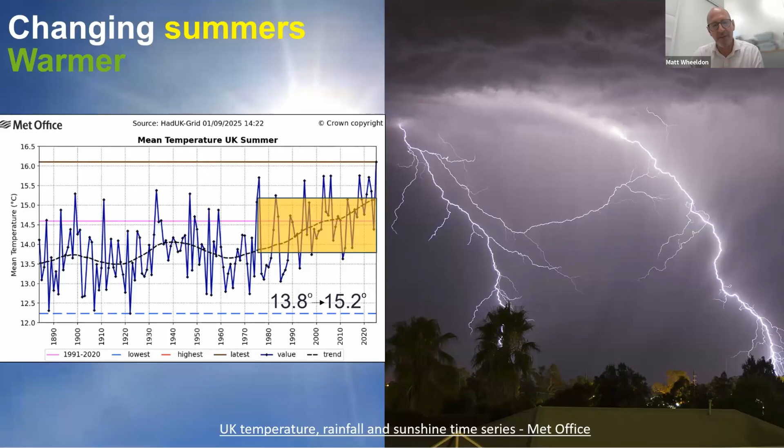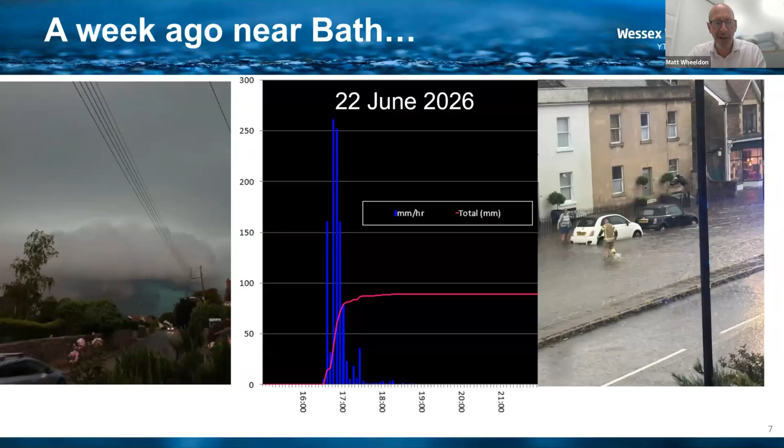So 50 years ago, 1976, of course, a very famous drought for those of you who remembered that. Many of you won't remember that, but in those 50 years, the climate has changed remarkably. And if you project that dashed line forward another 50 years, boy, we're going to be in a very different place. And of course, that warmer summer brings wilder weather. So whilst the rainfall volumes don't actually increase, the weather becomes a lot wilder. And last week, last Monday, this was the weather in Bath, where I live.

And that middle graph shows the rainfall intensity. For 10 minutes, we experienced a rate of 250 millimeters per hour. We don't even have the ability to give that a return period, because the Flood Estimation Handbook kind of loses a bit of definition when you get below events that last less than an hour.

We're entering a new world, a world of tropical weather. And today is the International Day of the Tropics. So a very opportune day to be speaking on this, because our weather is moving from one of just drizzle to one of drought and deluge. And the picture on the right is just down the road from me, where there was certainly a massive deluge.

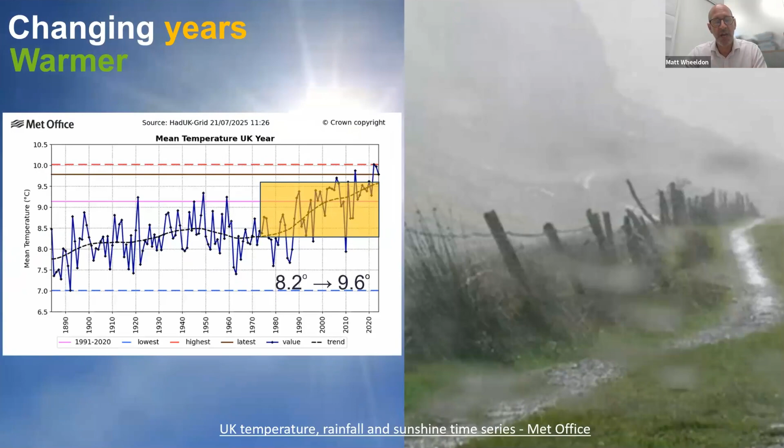Of course, it's not just our summers that are changing, our winters are getting warmer as well. And with warmer winters brings wetter winters. And then add in spring and autumn, and overall what we're seeing is a very rapid, well, from a climate change perspective, change in temperatures and rainfall. So over the past 50 years, rainfall over the year has increased on average in the UK by 150 mil a year. That is significant.

So let's get back to our topic, because of course, flooding and storm overflows are all about having too much rain. And water companies are investing billions to try and address this on their sewage networks. And there are kind of 4 options open to them. 1A and 1B in front of you is called separation. That's where you take the rain out.

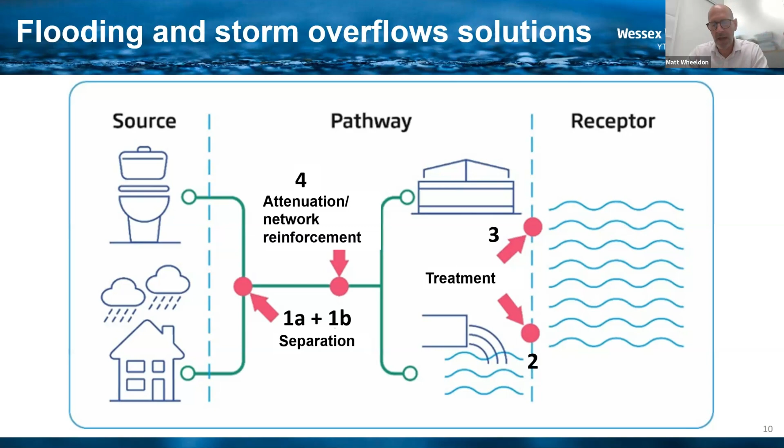2 is opportunities to treat the overflows. 3 is where you increase the treatment capacity at the treatment works. And 4 is where we deal with the problem in the pathway. We attenuate the rain, or we just build bigger pipes. I'm just going to go through these and talk about them relative to one another. And you'll see where I'm going to end up in 1A being the best solution.

The traditional solution for storm overflows has always been storage tanks. Very high carbon embodied in the concrete, and then a massive carbon footprint for then emptying them and then treating them. People forget that this contaminated rain all needs treating, and when we treat, we use energy and we use chemicals. And a lot of those chemicals are flow related. So if you're going to treat a higher flow rate or flow total volume, you're going to use more chemicals. And the carbon footprint of those chemicals is pretty significant.

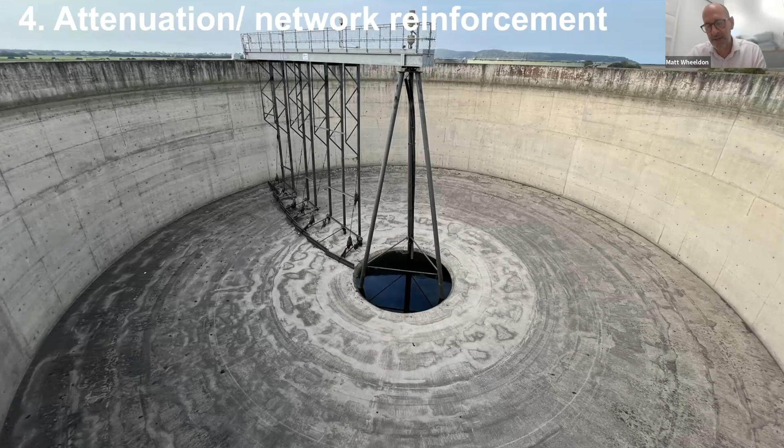Just to give you some perspective on this, in a dryish year, we treat more than 50% more liquid than we provide our customers. So that means that 50% of the total flow that we treat is rainwater, and in a wet year, that number goes up to 80%. So that 50 to 80% extra liquid treated because of combined sewer systems is going to go up even more if we deliver these kind of solutions. The energy is amazingly high.

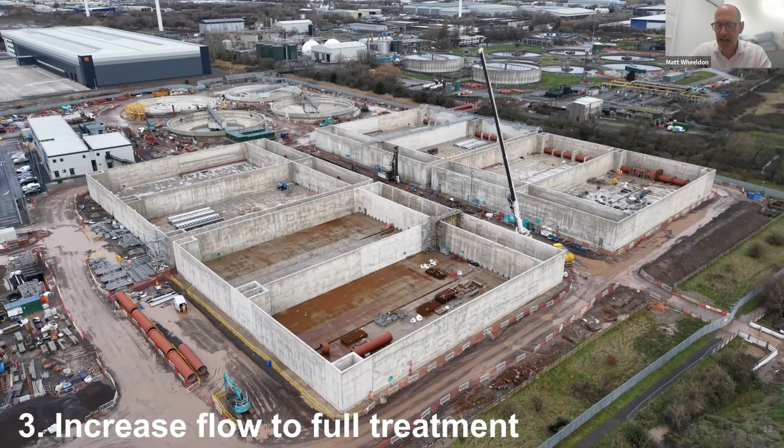Option 3 is you increase your treatment capacity at the sewage works, at the water recycling centres. Here is £150 million being spent at our largest site here in the West Country. This is at Avonmouth. We're increasing the flow to full treatment, that's the maximum flow rate, to 5.7 tonnes a second. Now, when you think how much sewage is actually arriving at this site, it is 1.5 tonnes a second, which means that we are treating 4.2 tonnes a second of rain. How daft is that? That is a traditional solution.

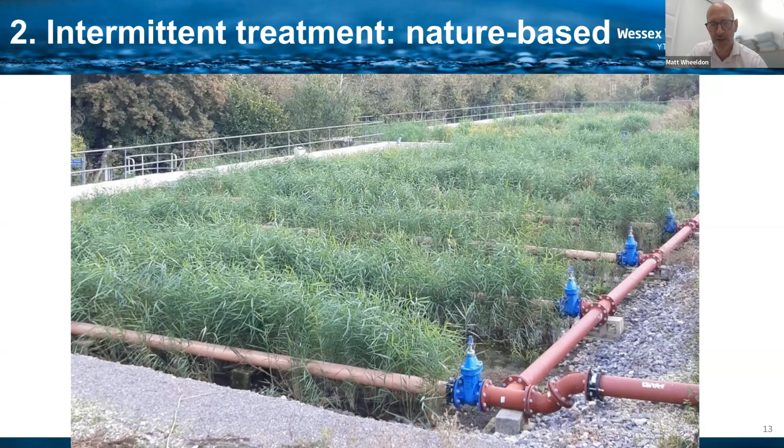People realise that a lot of these overflows are very low in concentration of contaminants and pollutants because of the dilution factor of rain. And so recognising that the level of treatment doesn't need to be significant, nature-based solutions, especially for overflows that are driven by groundwater, have become a very viable option, especially as DEFRA and the EA are now accepting these as trials. We've got 31 of these going on here at Wessex Water. The influent is incredibly weak, and the effluent is even better treated through these reed beds and nature-based solutions. So great, but an end-of-pipe solution, not really tackling the problem at source.

Let's get onto separation solutions and managing rain closer to where it lands. Developers have built communal SUDs for quite some time now, but they're not as great as everyone shouts about because quite often there is a lack of management and maintenance. Quite often that's passed on to a management company. The customers in the properties are paying not only to have their rain taken away in the pipes by the water company, but then paying another cost to the management company to maintain the SUDs. And when you look at that very same SUD on a map, what you'll see is that where we're dealing with the rain is some distance away from those new properties that have been built.

And that's not always a great idea, because if nature wouldn't have done that naturally, we're interfering with nature and we're moving the rain horizontally and gathering it together with its mates. And whenever you gather rain together with its friends, it generally causes problems. We should be really trying to keep raindrops lonely. They're far easier to manage.

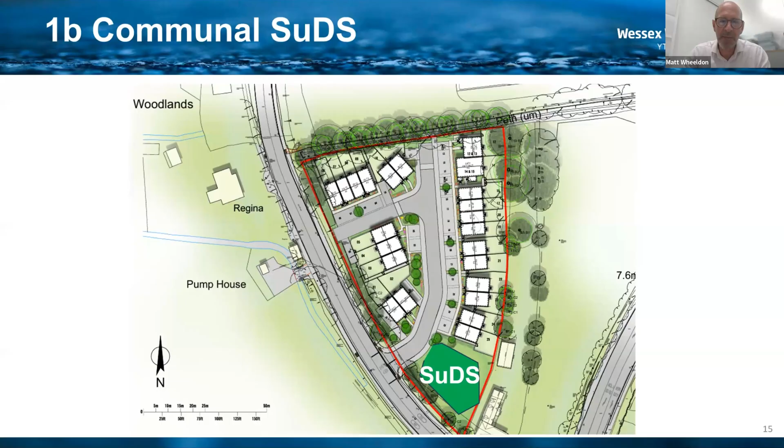And if you keep them very local at property level, it suddenly opens up another door of opportunity, and that is seeing rain as a resource. And the simple old, humble old, cheap old water butt is a great way of flattening the peaks of water demand. But then a simple rain garden or soakaway is a great way of getting rid of that rain back to where nature would have put it in the first place.

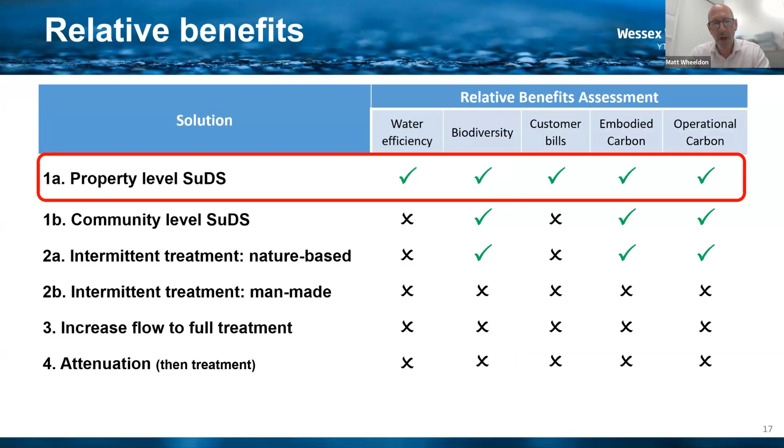So looking at all those options together, property level SuDS stand above them all from an impact on customers' bills, carbon footprint, biodiversity, and also water efficiency. Why aren't we doing them en masse? We're not really focused on where the problem is. You see, the problem is in our homes. The problem is that we're filling our toilets with drinking water, and then we're adding the rain off our roofs into the same flush from those toilets.

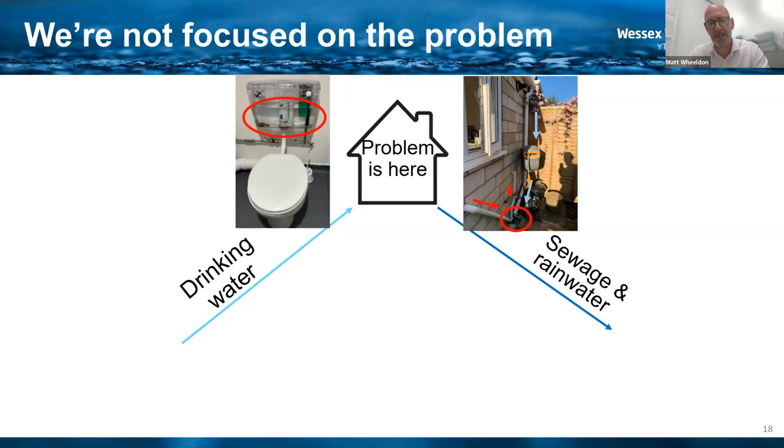Traditionally, water companies, on whom the burden to tackle these problems has always been put, fix them with centralised solutions. In the current state of play, lots of new strategic resource options are focused around big reservoirs. And on the storm overflow side, big new storage tanks.

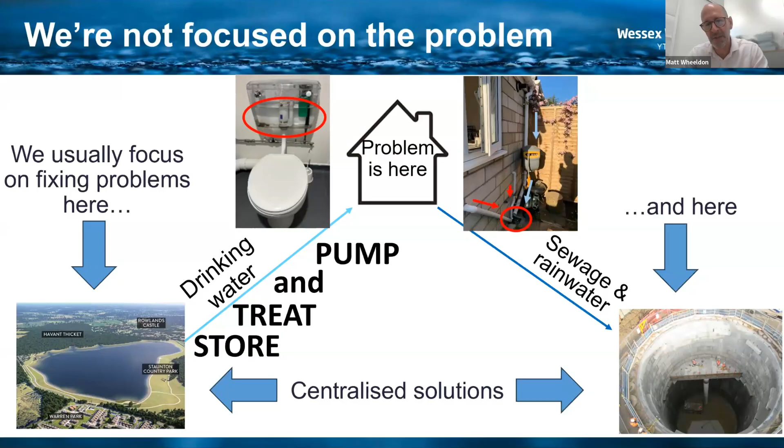And all that means is we're going to store, treat, and pump more drinking water to all these new homes that are being built, so that we can fill the toilet systems and water the gardens with drinking water. Then we're going to continue to allow rain to be added to the sewage, where we're going to store it, pump it, and then treat it all. These solutions are not great long-term, sustainable, climate-resilient, low-carbon solutions.

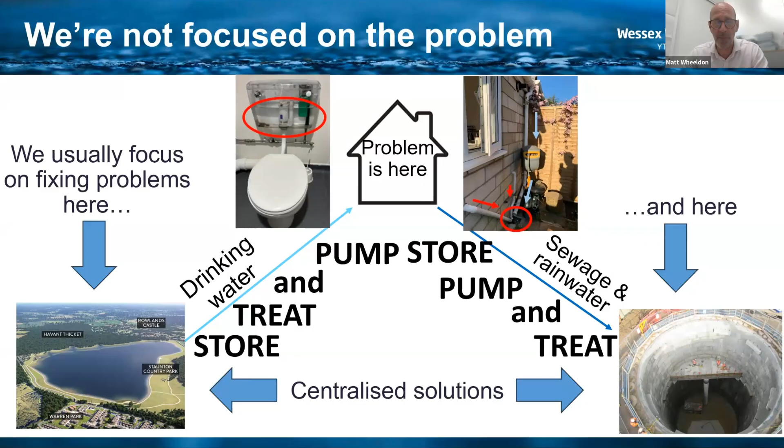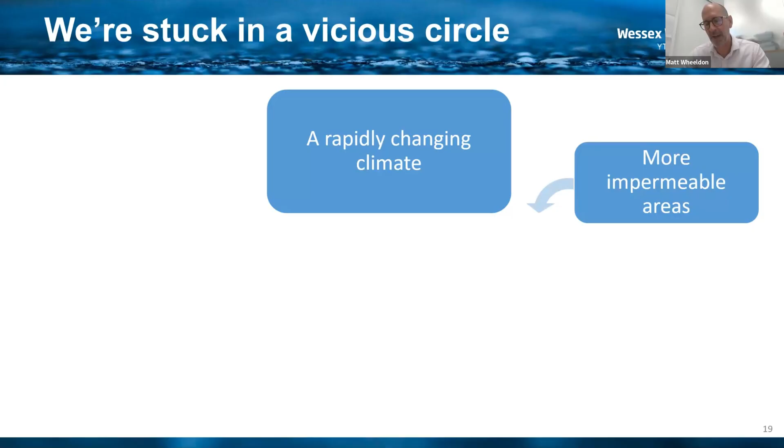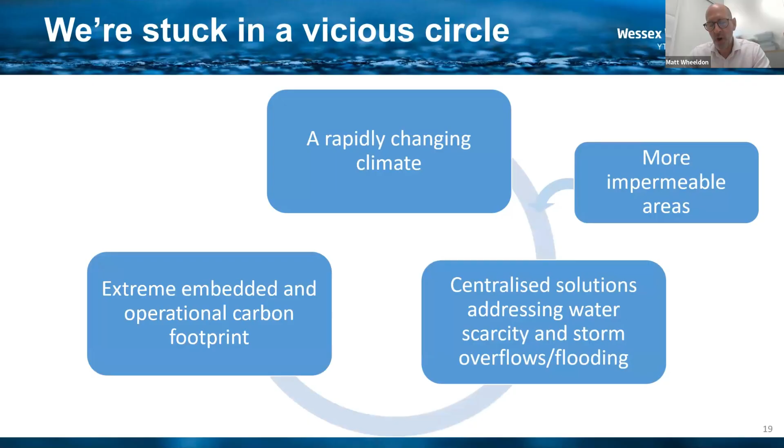And so we're stuck in this vicious circle with a rapidly changing climate that I've talked about. We're building 1.5 million homes, which will add a lot more impermeable area, and people are constantly paving over their driveways so they can park their car near their home, so they can charge their electric vehicles. Water companies are trying to solve the problems with centralised solutions to address both water scarcity and storm overflows and flooding, and that leads to higher carbon footprint solutions, which then creates a rapidly changing climate.

Oh dear, what do we need to do? Well, as I said right at the start, this is not rocket science. Janet and John were famous characters in the 1940s and 50s in children's books, and they were renowned for speaking very simple language. And that's really how we've got to start. We've got to start by changing the narrative.

You guys, because you are connected with CIWEM or you're linked to CIWEM, will understand words like integrated and systems thinking and holistic and catchments. But sadly, most people don't understand those. So we really need to simplify the language and just talk about managing rain better where it lands. This is a message that is simple, but it is a message that is getting through.

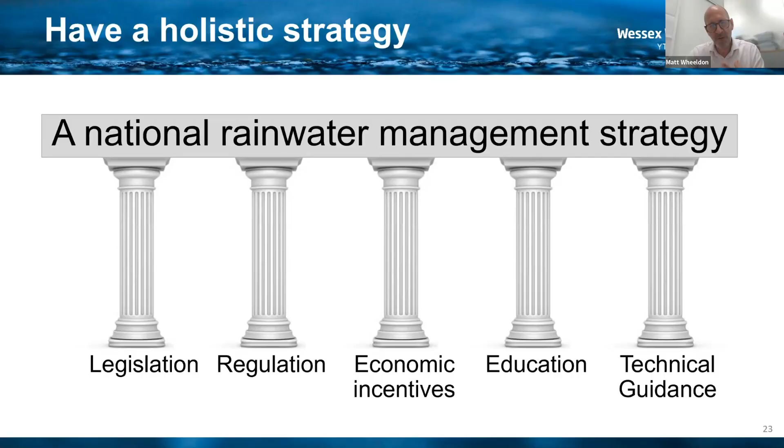Well, we do need a holistic strategy to deal with rainwater, and it's something that we don't really have in this nation. There's nowhere where people are considering changes to legislation, regulation, building economic incentives to help people do it, improving education and improving technical guidance. There's no one who brings it all together. And that's something that I've been trying to do over the past few years, just to show politicians, civil servants, regulators, everyone who's involved in this space, including property owners, what we need to do to manage rain better where it lands. My view is you target easy things.

And when it comes to these two principles on the left-hand side, new build provides the greatest opportunities for capturing rain locally and using it. When we build new homes, putting in rainwater harvesting to flush toilets and water gardens is the greatest opportunity that we have. Retrofitting that kind of stuff is incredibly expensive, but it's still possible to do, especially outside, where you could put in a water butt when you're taking the rain off the combined sewer.

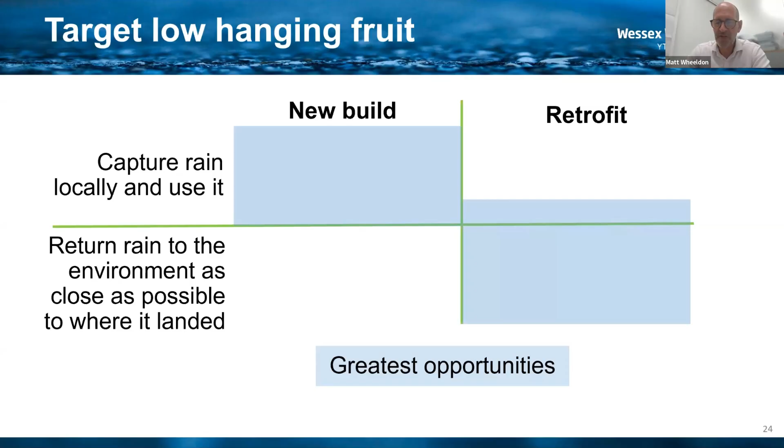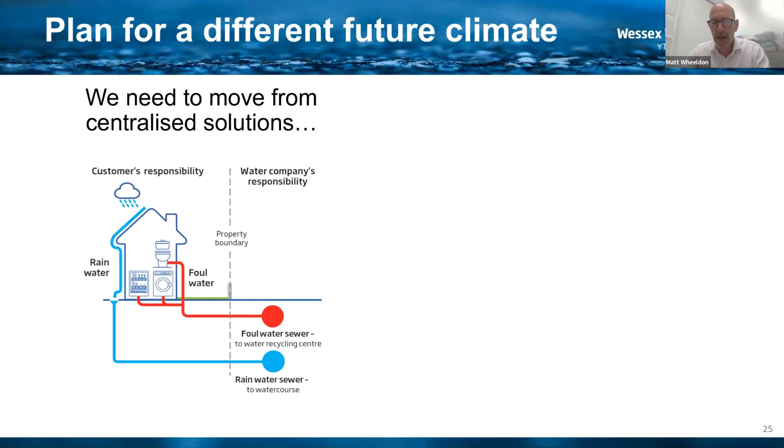But the biggest benefits will be to the drainage side and getting that rain back into gardens and away from network capacity constraints and storm overflows. So really, those are the two main areas which will provide the greatest opportunities to help us move from our current infrastructure, which is all about taking drinking water from miles away and then using it for non-drinking purposes, and then returning it back in a centralized system for someone else to look after, instead of let's look after it

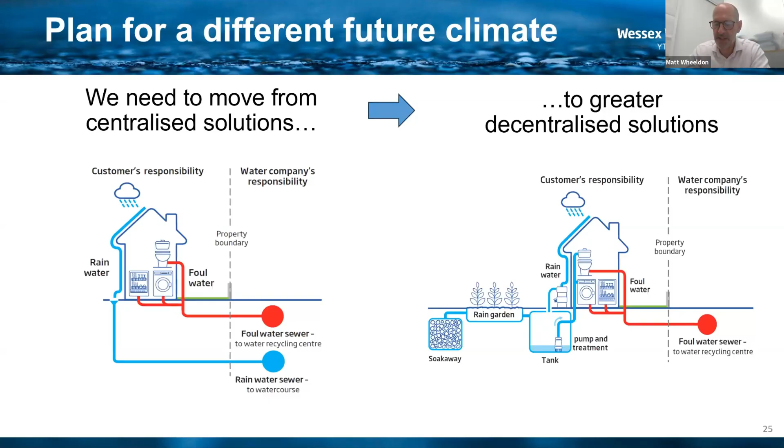ourselves. If you want a good example of legislation that covers that, you just need to read Germany's federal water law, where it puts the burden for both conserving water and not accelerating runoff on every person. Not on water companies, but on every property owner. They have duties to manage the rain where it lands. So there's a lot happening in this space, which is very, very exciting for me and for everyone who's involved in this. DEFRA certainly get it.

In the new vision for water, the water white paper that came out at the start of the year, they are talking about rainwater management. They're also recognizing that these approaches are more sustainable and deliver wider benefits, as I've just explained, reducing flood risk, supporting biodiversity, sorting storm overflows too. They also recognise that there's not one single thing that's going to help us do that. We need changes to legislation, changes to regulation, and changes to funding streams. What they do here is they call them pre-pipe solutions, which doesn't really make much sense. I always tell them to use the word source control because that's easier to understand.

The Water Minister gets it. Brilliant. It's great to see Emma Hardy here talking about managing rain where it lands and talking about rainwater management. So that's brilliant. The new national SuDS standards from DEFRA get it. Look, they've changed the SuDS standards into a rainwater management standard because the first thing you do when considering where rain goes is you consider how to use it. That is a massive change in the hierarchy of what you do with rain. You collect it for non-potable use. Spot on, well done DEFRA, and then you return it to the environment as close as possible to where it first landed. And hopefully you never get to point 5 at the bottom.

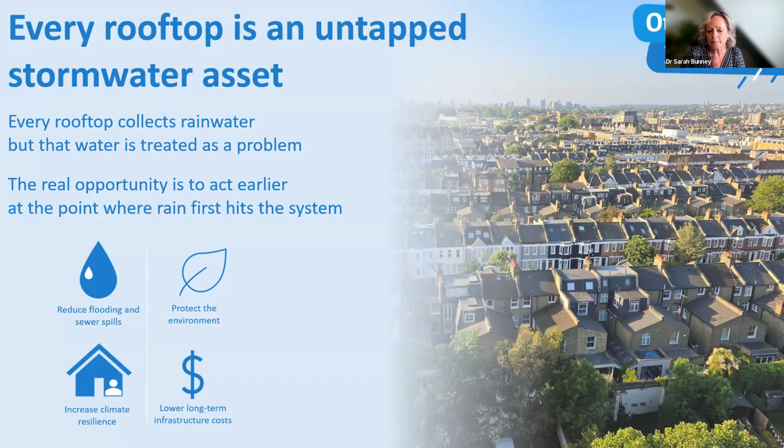But how does this relate to what we do at Our Rainwater? Well, we turn rainwater systems into intelligent managed infrastructure. So what we do is we combine four capabilities. We use optimization modeling to try and identify the right solution in the right location to meet the client's objectives, but also for the problem that we're trying to solve. We then help communities to understand and adopt those interventions at scale through our engagement programs.

We continuously monitor how these systems perform under real rainfall conditions, so we can use that information to optimize performance over time, but also to deliver measurable outcomes at scale. And together, those capabilities help us to transform individual rainwater assets into intelligent managed infrastructure.

Now, we work predominantly at the moment in the space of domestic rainwater attenuation tanks. So that's going to be the focus of the presentation and the insights that I'm sharing with you today. So I just wanted to set the scene so you'll understand where I'm coming from when I start talking to you about some of the insights that I want to share with you today.

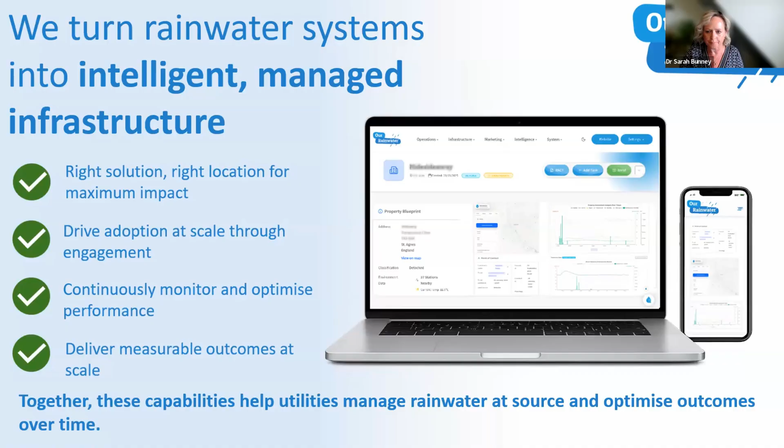Now, installing more assets isn't the same as scaling infrastructure. So the UK is investing very heavily at the moment in distributed rainwater infrastructure, which is great. We already have an excellent toolkit of interventions: rain gardens, swales, permeable pavement, rainwater management systems, and we have the SuDS manual, as Matt mentioned as well. But installing more assets isn't the same as scaling infrastructure.

We have climate change, we have population growth, we have aging infrastructure, and that increasing pressure on water resources. And this all demands a connected approach. So the question isn't simply how do we install more? The question is how do we build measurable systems that continue to improve over time and help to answer some of the questions that Matt had on the slide at the end.

And that question has shaped much of our thinking. And what I wanted to do today is share some of the insights, or our discoveries, if you like, but at a very high level. So I'm not going to delve into the details of any of these.

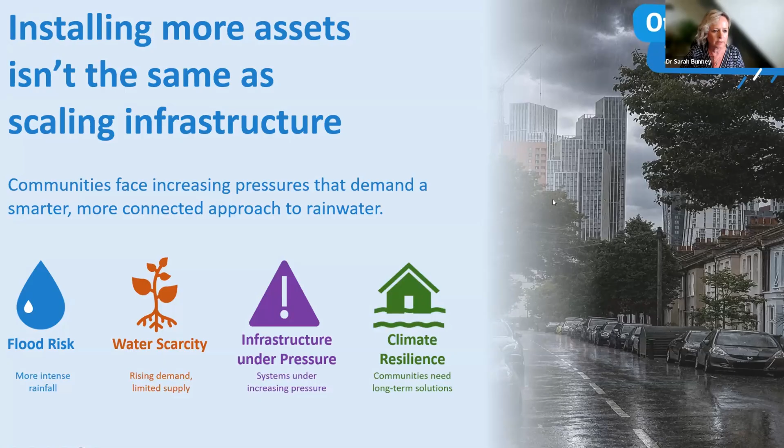So our first discovery is every catchment is different, every location is different. When people talk about scaling, it's very easy to imagine doing more of the same. And this is certainly, in some instances, something that we see a lot of. So you have more rain gardens, more rainwater tanks on people's properties, more disconnected downpipes. And scaling then starts to become synonymous with quantity.

But when you're delivering on the ground, you're learning something different, that there is no universal intervention or one-size-fits-all approach, especially if you're looking across a catchment. And each catchment and each location has its own different set of objectives, different constraints, but you're also working together with different communities. And the right solution always depends on the context.

Sometimes the priority might be reducing flood risk. Sometimes it might be reducing combined sewer overflows. Sometimes it's increasing resilience or maximising water reuse. And a lot of the time it's a combination of all of these and more, but also including that engagement and building trust between water companies and the communities they serve. And it seems obvious, really, that different objectives will lead to different solutions. And this is why we work very, very closely with our clients to help define those objectives from the start, because it's really important.

Now, the right intervention depends on context. And the reason why I'm saying that is the same objective can require different interventions in different places. So, for instance, we've seen instances where a detached property with a large permeable garden might be an excellent candidate for infiltration. So you can disconnect the downpipe and perhaps feed the pond, or put the rainwater into the garden and feed the trees. We actually had an example of that last week in one of our deliveries. Whereas a Victorian terrace with a small concrete courtyard might only be suitable for attenuation.

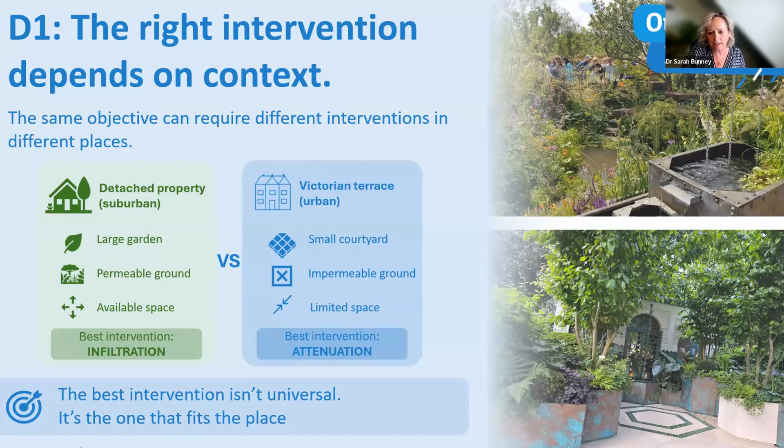And from our experience of delivering solutions on the ground, scaling isn't about repeating the same interventions. It's about making better decisions about which intervention belongs where. And this is why we start a lot of our projects with optimization modeling. Now, modeling is the beginning of understanding. So we see modeling as something that helps us to identify where interventions will deliver the greatest impact. And it's an important first step in our operating model, not because it gives us all the answers, but because it helps us to ask better questions.

Where is the greatest potential for an intervention? Where will interventions deliver the greatest impact? What combinations of solutions will achieve the client's needs? And in many instances where we're delivering residential schemes, what will work better for the householder and the community? And in this slide, what I'm talking about as well is that we should be thinking more integrated across catchments about how the different solutions operate together.

So you can have rain gardens in one area, swales in another, perhaps householder attenuation tanks. There's so many different interventions, but making sure they're all integrated and connected is something that we're not very good at. So modelling isn't the end of the process. For us, it really is the beginning of understanding.

Now, not every property can participate when you're talking about residential rainwater attenuation, and that's okay. We're quite accepting of this. And we also make a point of recording the people that can't participate, because in the context of installing rainwater attenuation tanks, some householders already have existing systems. And it's not that they're disengaged. It's that they don't want another rainwater tank because they have no spare downpipes to disconnect.

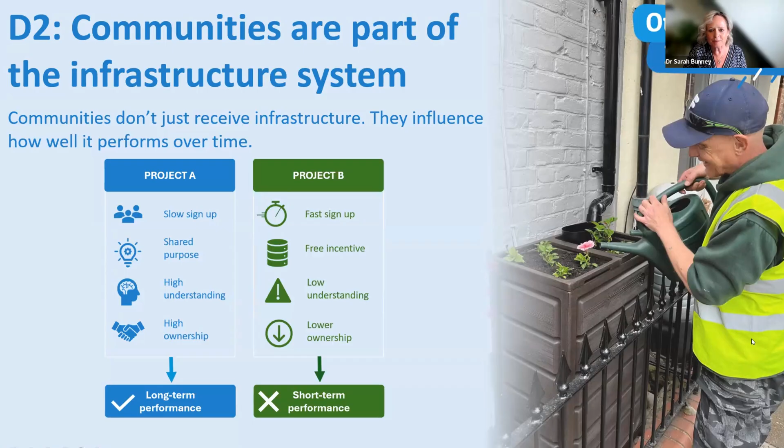And what we found were the motivations for signing up. It wasn't because they were interested in the problem or trying to capture the rainwater. They were only interested in the opportunity to receive a free rainwater tank. So that for us was very important because then we're thinking, okay, in long-term performance, that's probably not great. So we need to do a lot more work here. And at first glance, that second project looked a lot more successful when in reality it wasn't. And this is what I mean about there's definitely a science to all of this.

If people don't understand why infrastructure has been installed, they're far less likely to value it or manage or maintain it over time. And what we want are systems that are performing throughout the lifetime of the asset. So you need people to be engaged with their system because over time that will influence how well the infrastructure performs. And that's why engagement isn't separate from engineering. It's very much a part of it. Every community has different motivations, different experiences, different levels of trust. So it really has to be designed with the same care that we put into building the infrastructure itself.

And that has been a really big insight that we wanted to share with the sector, because communities aren't simply the beneficiary of infrastructure, they're part of it. Infrastructure performs where engineering, environment and people come together, and once you start to understand that, projects stop being about isolated interventions, they become opportunities to learn. And that brings me to our third discovery.

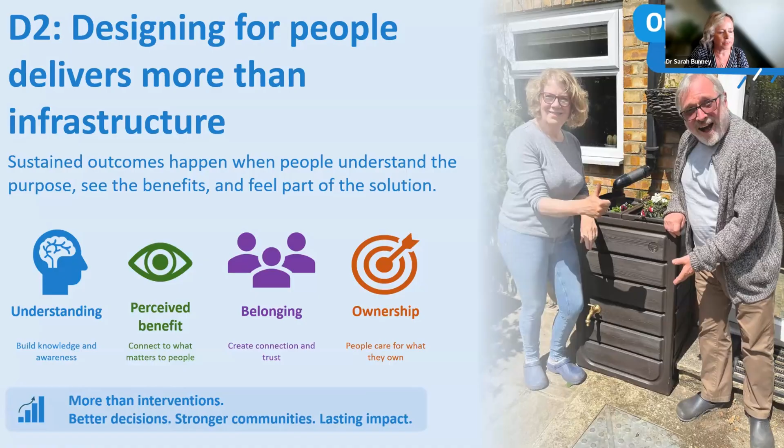Now, monitoring, that transforms infrastructure or helps to transform infrastructure into a learning system. And our third discovery has influenced how we think about distributed rainwater infrastructure. Right from the start, we saw the value of monitoring interventions so that we could understand how they perform under real rainfall conditions, so that then we can use this information for future decision making, but also to optimize further and improve project outcomes over time in the project we're working on, but also future projects.

So we take a lot of the insights from our projects and we try and share those insights as much as we can, because monitoring doesn't just validate performance, it helps us to understand how the whole system behaves. We've learned that products don't always perform exactly as expected under real rainfall conditions. As we know, rainfall varies across catchments. We've learned that people interact with infrastructure in ways we hadn't anticipated. And every one of those observations helps us to improve our communication and the interventions and our engagement for the next project.

One example that challenged our assumptions was water reuse. And on projects where water was primarily used for garden watering, reuse was much lower than we'd expected, even from gardeners, which doesn't make rainwater reuse any less valuable, but it just reminds us that understanding how people use these systems is just as important as understanding how we design them.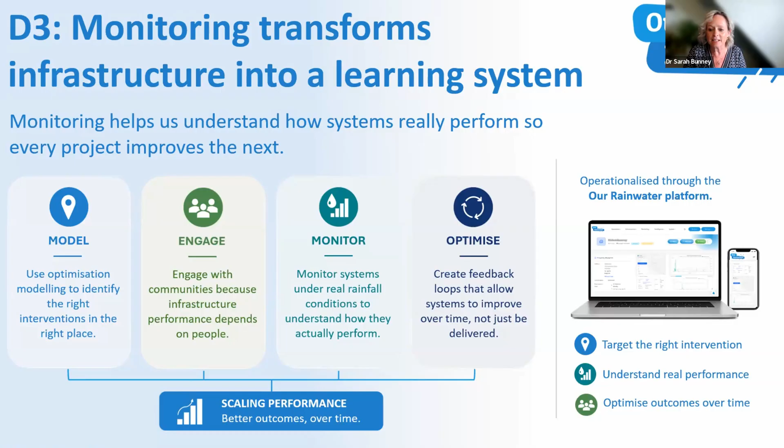And for me and my team, I'm talking on behalf of the rainwater team, that's what makes really exciting opportunities for our sector, because we're no longer simply installing distributed infrastructure, we're building a distributed infrastructure system that has the potential to learn. So I'm not talking about AI here in general. So building infrastructure that learns. So what have these projects taught us? Well, it's taught us that scaling distributed rainwater infrastructure isn't simply about installing more assets. It's about building better systems. Systems that recognise every catchment is different, systems that recognise every community is different, and systems that become more intelligent because every project teaches us something.

For many years, we thought about rainwater management as a collection of individual interventions, so a rain garden, a swale, a tank, a permeable surface, but delivery changes your perspective, because then you stop seeing individual assets, and you start seeing that connected system, a system where modelling helps identify the right interventions, where communities influence long-term performance, where monitoring generates evidence that improves future decisions, and where every project strengthens the next. And that for me is what scaling should look like, not simply distributing more assets, but building a system that continuously improves. And that's what managed infrastructure really means. Not infrastructure that's installed, but infrastructure that learns, or that we can learn from.

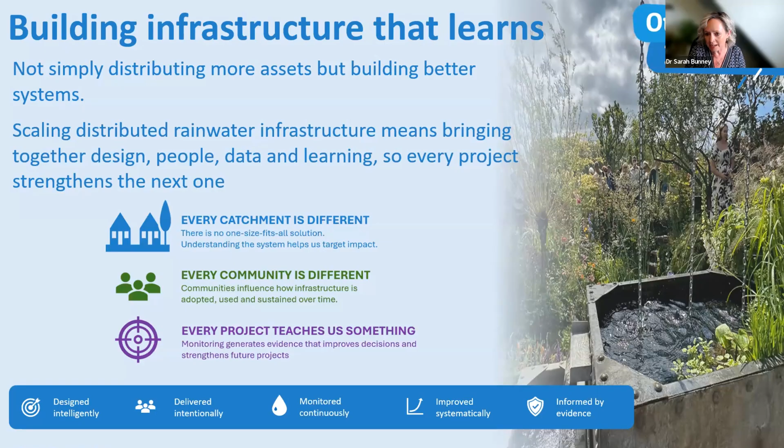And the opportunity now is to bring all of those things together into an operating model that is designed intelligently, delivered intentionally, monitored continuously, improved systematically, but informed by evidence. And that's very, very important. So for us, and we're totally with you, Matt, on this, the future of rainwater management starts at the source. But at our rainwater, we are also building that operating system, one that helps utilities to identify the right interventions, to engage communities, understand real world performance, so we can continuously improve outcomes over time. Because the future isn't installing more assets, it's about building a system that learns. Thank you. Thank you, Sarah.

We've had a question. Even if each system is small, the risk aggregates at catchment scale. So who ultimately owns the flood risk if these systems fail or collectively exceed capacity? Yeah, that's an interesting one. So with the rainwater tanks, in the way in which they're installed and the way in which they're designed, they shouldn't fail to cause any kind of flooding on a large scale, or collectively exceed capacity.

But I suppose when you're thinking about, and this was an interesting conversation I had in a meeting last week, and this probably fits more with agriculture actually, if you're building ponds for agricultural purposes, there was one incident that I do remember when I worked at the Environment Agency, where a private landowner had a series of ponds connected to one another, and these were quite large scale ponds, and one of the banks on one of them was starting to collapse, and we had to think about, at the Environment Agency, how we would then either evacuate that location, because there were a large number of household properties further down, or how we would also warn those properties, because they weren't usually at risk of flooding, because we managed flooding from the rivers.